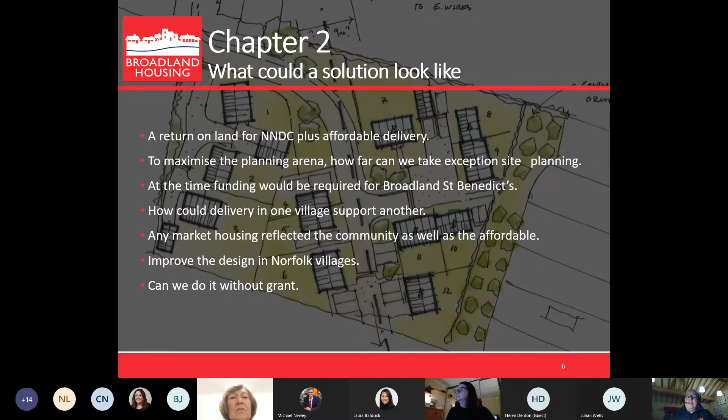So the first ideas - this is actually from a flip chart we did, one of our first ideas of how to get this to work. In conversation with North Norfolk District Council, could we get them to help fund both organisations? Could we get funding into Broadland St Benedict's, which was the market vehicle, to help that, so we could go and get more funding from banks? And could we also help the association with funding to actually deliver the affordable housing?

So this is a very quick picture. Some key elements in this structure that really help us: Broadland St Benedict's is a limited company - a private limited company, wholly owned by Broadland Housing Association, 100% owned by the association. The great thing is that in terms of tax, the limited company can gift aid - you see gift aid on a lot of charity donations. It can use gift aid, so the profits can come into Broadland Housing without having to pay tax, as it's a not-for-profit charity. So it's really how we could use the model here to maximise delivery of affordable housing and maximise the money coming through into the housing association.

So the result - this is chapter 3, the result. NNDC identified 5 sites, which to be honest I knew they had anyway, so that was good: Great Ryburgh, Binham, Trunch, Edgefield and Erpingham. I've only got 4 of them up here because I couldn't find the 5th, but we had Erpingham, Edgefield - a little bit of an issue with access with the land. We had to come through an existing scheme with a very narrow highway access. So we approached, as any good developer would, the next door neighbour, which was the Stody estate, and the McNichol family allowed us to buy an additional area of land at Edgefield that enabled access through to the NNDC land.

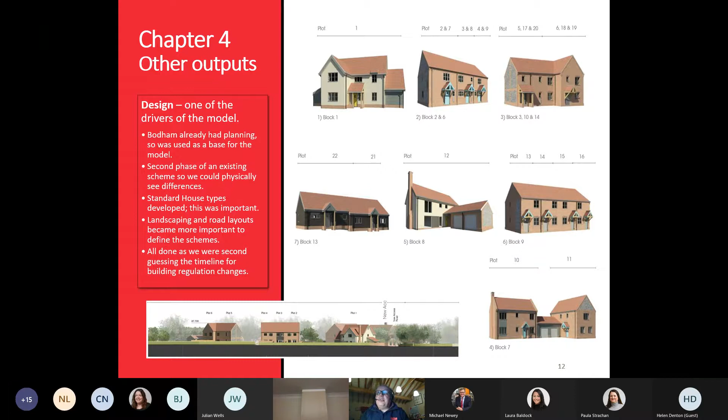So this is Bodham phase 1, built in about 2008. Local firm Draper and Nichols from Norwich built this. You can see this is our starting point in putting flint back in, the estate railing. We still had to do, unfortunately, with the highways the black tarmac, but you can start to see that it was starting to change in terms of our design thought.

However, when we got to Bodham phase 2, which was, I suppose, 2015, you can see how we'd started to move on. We're still using flint, but the type of housing was changing dramatically, and you can see in the photograph on the right hand side the end of phase 1 and the start of phase 2 coming through.

The use of the road is not just a straight road anymore. We're starting to put curves into the roads. The landscaping is starting to change, and this is where that design influence, being able to put 6 market housing into this scheme of 16 houses, was able to just give us that extra flexibility in terms of finance to start producing much better design housing.

Also, part of that design was highway specification. This was actually the Erpingham layout, but I've used it because we had some really interesting challenges, and any developer would say it with highways, because they have a massive color palette of black. What we're trying to do is really create design in the changing of the textures of our highways and how all the footpaths work, etc. It is very, very difficult when you're up against these constraints.

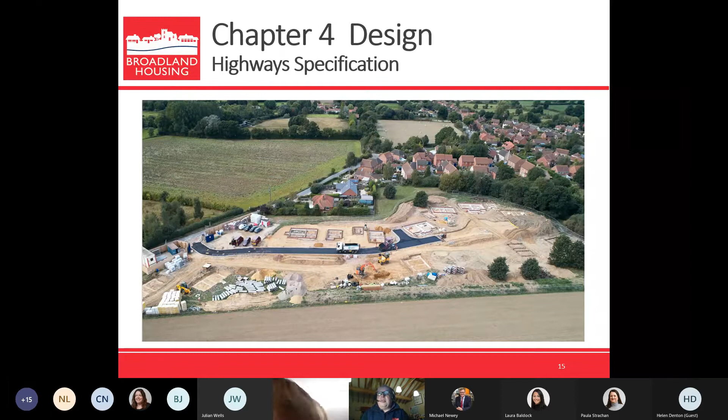If we wish to adopt roads, so that they get looked after by the county highways team, it basically means we have to use their standards. That's become very difficult, and will do over the future, to produce anything that we want adopted to enable better design.

So the other output is, in terms of planning, pushing the boundaries of that planning sometimes needs a rethink of approach. We started talking to the planners about each separate scheme as we would develop, and actually it just wouldn't work. First, we had to go back to the point where we had to educate the planners about what we're trying to do and how they could actually use that national planning framework in a really positive way.

We had the help, of course, of Nicola Turner at North Norfolk at the time as well, and actually being able to have that strategic housing team help us negotiate that was really helpful. The planners came round, and eventually we used to have design meetings for the whole project, so they could start to understand how that cross subsidy was working. This was a major change, and the first time this section 106 had been used in the UK in this way.

Parish councils all have a different makeup, and it was quite difficult at the time, and it taught us an awful lot about consultation. Because if you think about it, with Binham, where we were funding Trunch and Great Ryburgh's affordable housing through the scheme at Binham, we had to try and explain that. We had to try and educate the parish council why we wanted to take money out of their village. That was how it was seen. So that was a big ask for parish councils to actually support that.

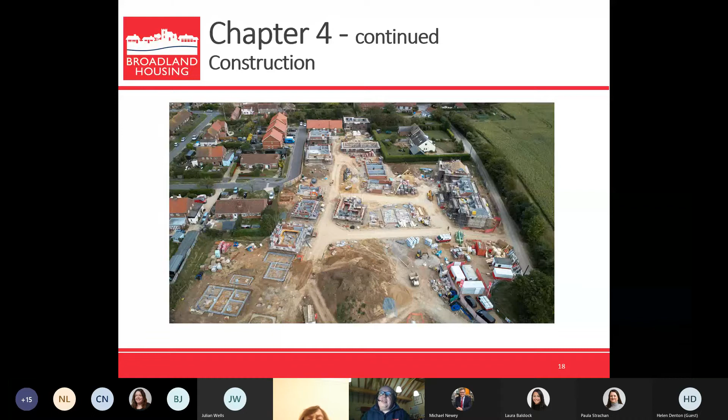So the only way you can do things is actually do it in my book, and actually we've learned how to phase much easier, so it allows us to get market housing out of the development much quicker than we did here at Binham, and because of that caused us a few cash flow problems on Binham as a development on its own, but actually those learnings we're going to take forward, and we've worked with all our contractors in a really positive way to make sure we can, with the limitations of design and build contracts, to make sure that it's much smoother in the future.

So it was an excellent outcome, really.

In terms of other outputs, sales and marketing - we've done sales and marketing for shared ownership before, either using agents or our internal sales team, but this was really different because we were putting market housing on top as well, and we had to understand the competition.

So we did a lot of journeys around sales homes and show homes in Norfolk, understanding what competition we had. Specification internally and externally had to be looked at in a completely different light, and it actually improved what we're doing and our relationship with our asset management team, because there was a lot of work to align specifications.

Education for agents was another big piece - they had to understand what was going on. Who are we? We suddenly came out of nowhere with all these sites sitting in North Norfolk. So there was a massive education process for them, and finding the right agents who would listen was a real learning experience. We had to make some commercial decisions where we felt an agent on one of the sites wasn't really listening to who we were, so we changed them. That's the commercial reality of what we're doing now.

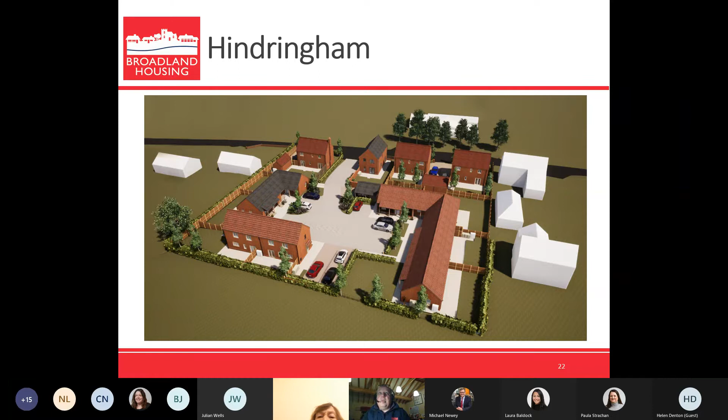Unfortunately, we've got no musical sound on this, but you might have the joy of some of my commentary coming in. This is where we had a slight problem earlier, so it is slow at some stages. So I do apologise if I'm faster than what you're seeing.

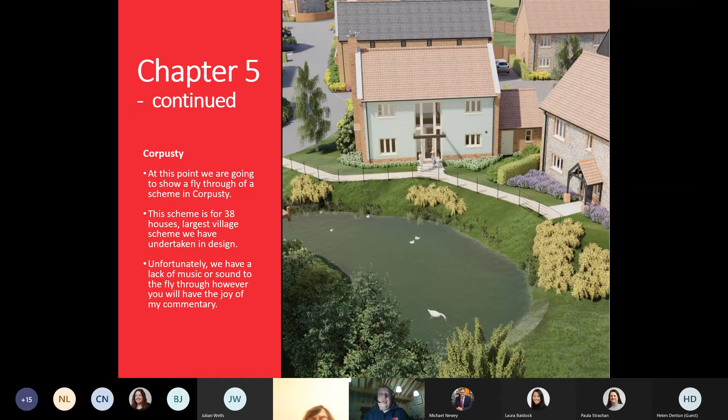So this is coming in from Norwich Road in Corpusty, a lovely village in North Norfolk, and we come left into what we're designing.

We're picking up, these are all standard house types, so there is nothing here that has been designed bespoke. But actually what we're doing is changing the window types, changing how they look by the materials. And the big issue we thought with this site was how do we not turn it into just 38 houses in a block.

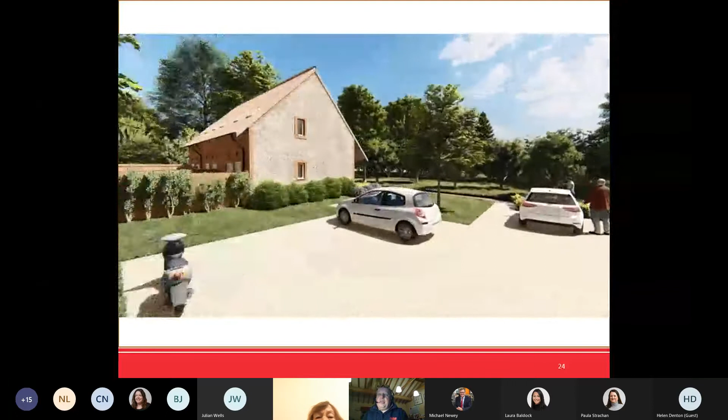This is a 1-bedroom house that we've used at Edgefield very successfully. And across on the left-hand side is some bungalows, a standard house type, that we've used at Trunch.

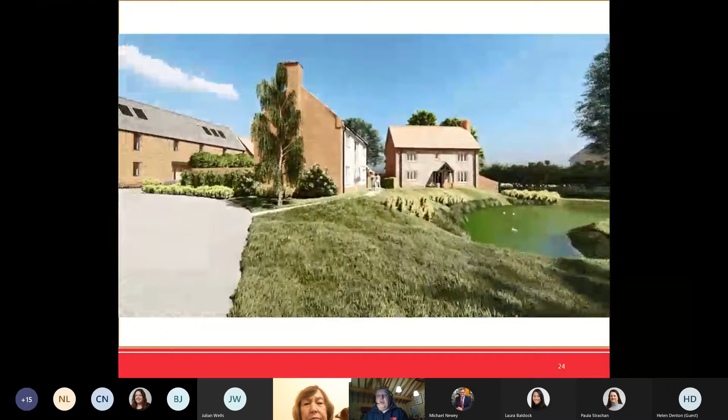We're moving away from garages and more to cart lodge type accommodation. One reason is cost - a garage is amazingly expensive to build for some reason - but also we're trying to in the future get a photovoltaic answer, so it's actually an energy cart lodge, with some battery storage at the back of it. That's quite cool.

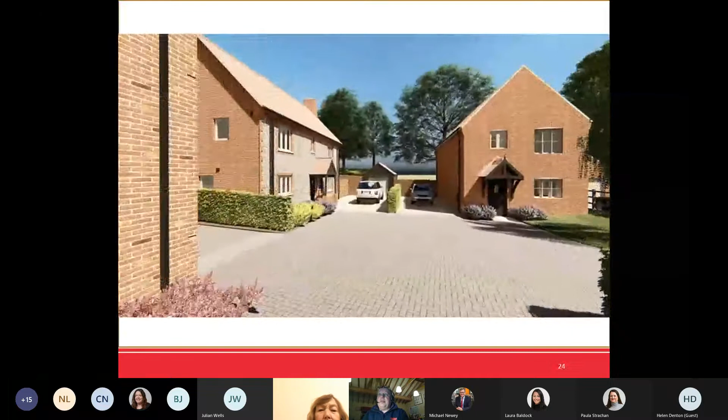The only house type we're having a bit of an issue with is the one where we've got the doors on the end elevation. It just needs a little bit more work.

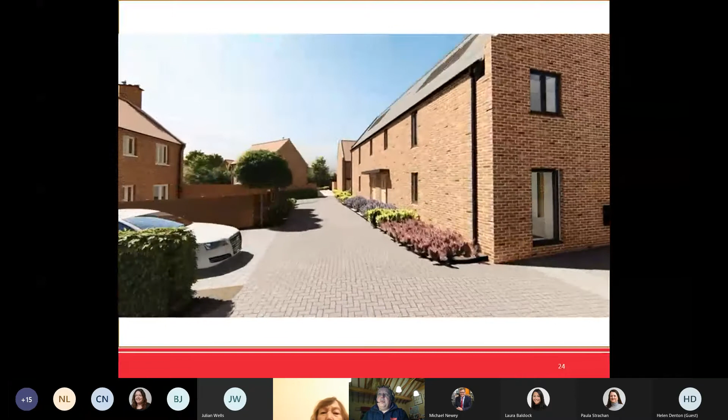This is standard 2-bedroom housing here, but 3-bedroom semi-detached, turned into a barn type arrangement with the smaller windows. And you can see we've got all these little courtyards coming off that main spine.

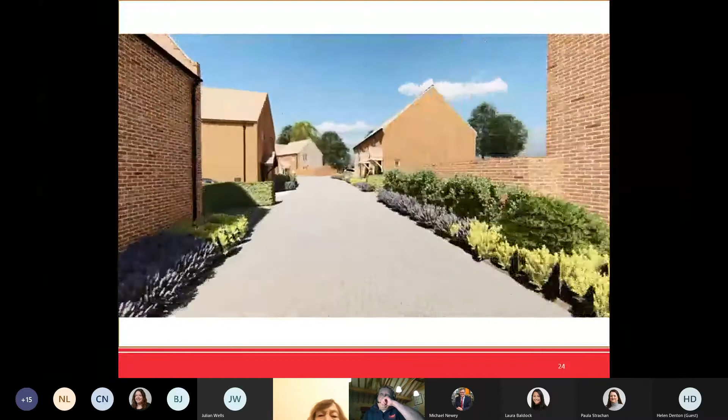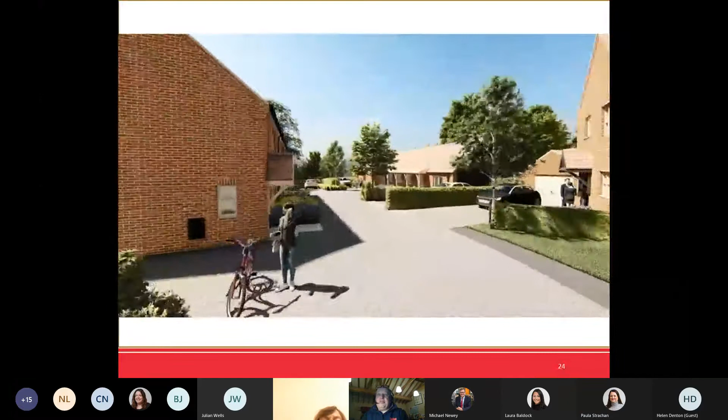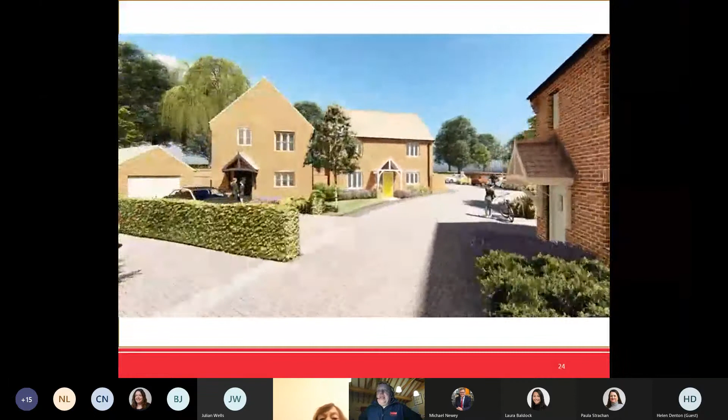This comes up further to the back of the site, still using the change in brick and flint, using the flint where we can on the end elevations so it stands out. And they're very shared spaces. You can see that we've had to move away from the black tarmac, so a lot of this we've got to work out how we don't adopt some of these areas so we can actually do what we want to do here, and still make it cost effective for the association in the future to be able to maintain. Really important, where we've got that extra maintenance in the future, that we keep the costs down.

Big issue we've got at Corpusty is surface water. For the developers developing in North Norfolk, it's a really big issue at the moment. The building regulations on surface water discharge - that's how you get your surface water off your site - is getting more and more difficult. So I will show you a solution that we've got in a minute.

This is going up into the air, and you can start to see - we've got to get this right because this is a significant extension really to Corpusty. 38 houses in a village is quite significant. So that's how it sits up above.

And you can see it's not straight roads. We're very higgledy-piggledy in terms of our house layouts, but we actually built it - we do the road layouts first and then design the buildings second, so we can get the flow that we want through.

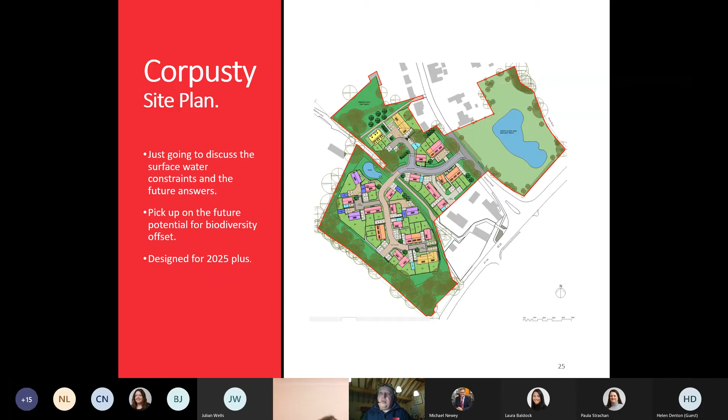So what we decided to do, there's a piece of land across the road that came up for auction in November. So we bought that, and we're going to put a surface water pond on the other site that leads out into the River Wensum. So we're doing a much more ecological, biodiversity type offset. That allows us to use less concrete and not put as much into the ground, and we're going to use a swale type system, basically ditches within our roads, on the side of the roads, to bring water down into the pond. Hopefully it's going to look a bit like this, rather than a big attenuation tank. We're going to open the space up, and in the future we'll be able to use this for environmental offset from smaller sites we're building in North Norfolk, where we're not able to get as much biodiversity onto that site. We can use our own land to do that in future.

So chapter 6, I'm nearly there, nearly finished. COVID time, the future. COVID time has been really quite interesting. Who would have thought that we would end up with a stock of one house at this point tonight?

In terms of market housing, sales performance has been absolutely amazing. I think this time last year we were redoing our business plan, saying I don't think we're going to sell anything this year. All our shared ownership is sold or under offer on all these sites. So sales performance has been superb, and the designs have helped that, the mixes have helped that. What's really interesting is the market housing purchasers have really understood what we've been trying to do. Certainly where we've had this mix of tenure on Erpingham and Edgefield especially, it has gone down really well because the market housing purchasers have really understood it. Shared ownership sold so well at Erpingham that we actually changed a couple of market housing plots into shared ownership, and we've been able to improve the specification as we go for the shared ownership, making it a much more marketable product.